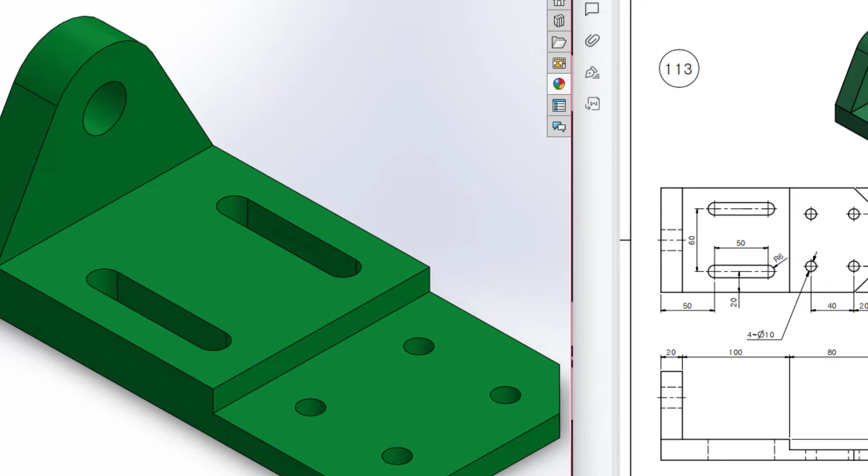Today we are going to solve this 3D problem. In this 3D problem, this is the isometric view, this is the top view, this is the front view, and this is the right side view.

I will start drawing from the front view. First I will draw this rectangle, and this rectangle has a dimension of 100 plus 20, it means 120 by 20. Then I will draw another rectangle alongside it, and this rectangle has a dimension of 80 by 10.

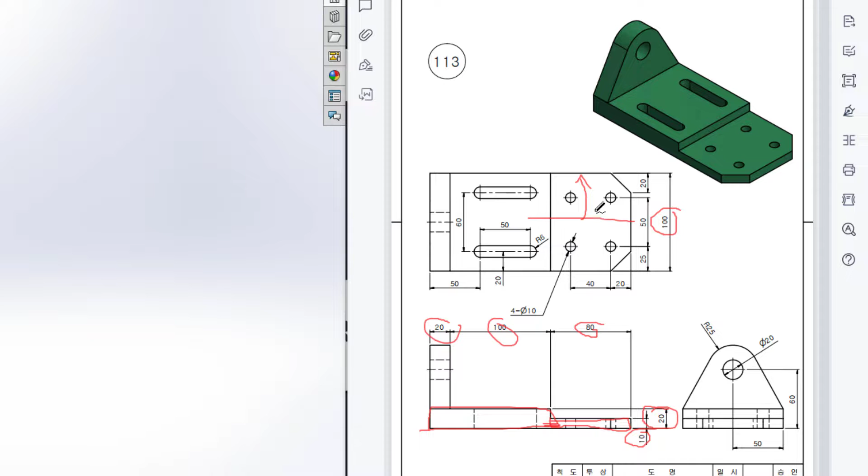Then I will trim this portion. After that I will extrude boss it to 100 units, and for extrude bossing I will extrude boss in direction 1, 50 units, and in direction 2, 50 units.

Select the front plane. Now sketch, select corner rectangle, place the corner rectangle to the origin. Now dimension it to 20 by 100 plus 20.

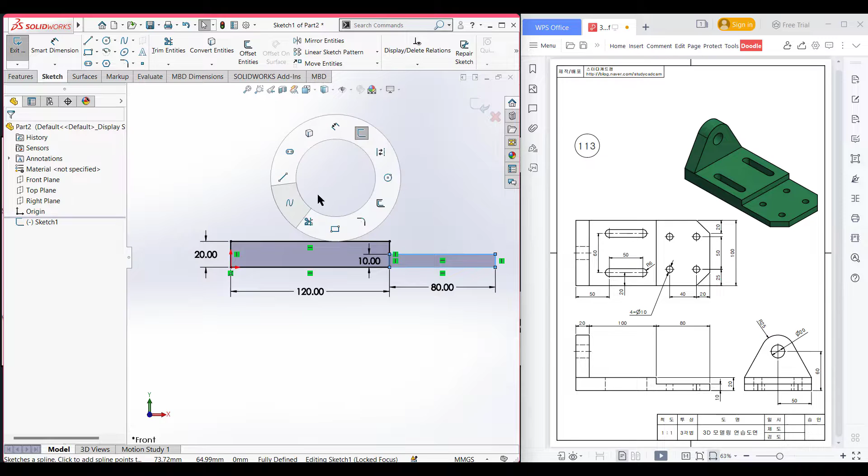Now again place the corner rectangle here, and dimension it to 10 by 80. Press OK. Now select the trim option and trim this line. Press OK. Isometric it for a better view.

Now go to features and then extrude boss. As the total extrude boss is 100 units, I will extrude boss it to 50 units in direction 1, and in direction 2 I will extrude boss it to 50 units. Now press OK.

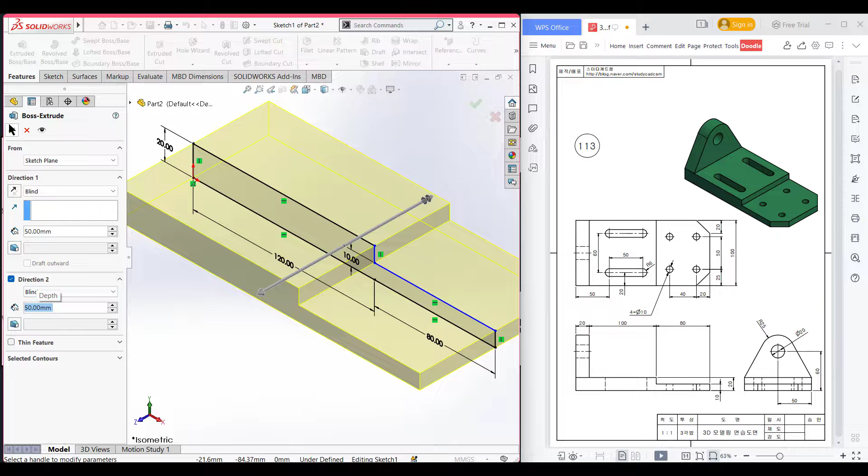In the top plane I can see a slot here, and this slot has a dimension of 50, and it has a radius of 6.

So I will draw first this slot, then after that I will draw this circle, and this circle has a diameter of 10, and it has a distance of 25 by 20, and I have another circle here, apart from 40 units. After that I will draw a center line here, then I will mirror this other circle and slot also.

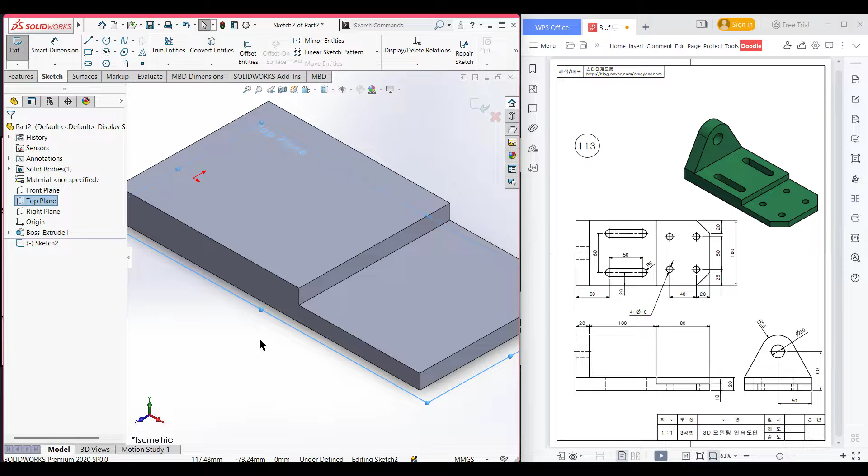So I am selecting the top plane. Now sketch, normal to it. Now select the straight slot option. Now place the slot here, and dimension it to 50.

As we have, it has a radius of 6, so the total dimension will be 6 multiplied by 2. So you can manually dimension it like this. It has a total dimension of 50 and a radius of 6 units.

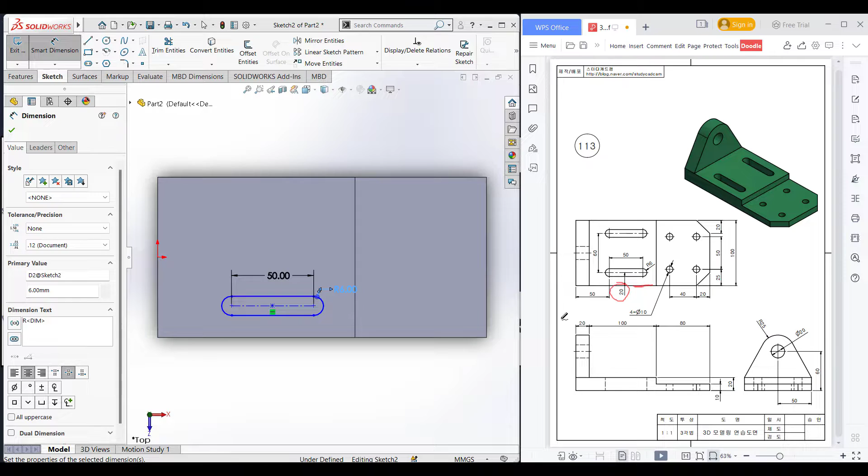We can see it is 20 units apart from this line, so I am dimensioning it from this to this, 20 units, and it has 50 units apart from this vertical line. So I am selecting this point and this vertical line and dimensioning it to 50 units.

Now press OK. After that select a circle, and now place a circle here and draw a circle of 10 diameter. Now select smart dimension option. Now dimension it from this line to 25 units.

Now select the circle again and dimension it from this vertical line to 20 units. As I have another circle, I will draw another circle alongside this center line and dimension it to 10 diameter. Now select smart dimension.

Now select these two circles, and they are apart from 40 units. Now we will use the mirror features to mirror all the entities.

For doing this I need a center line, so I am drawing a center line here. Now press OK. Now select mirror entities. Select this slot and these two circles. Now select mirror about this center line. Press OK. Now isometric it for a better view.

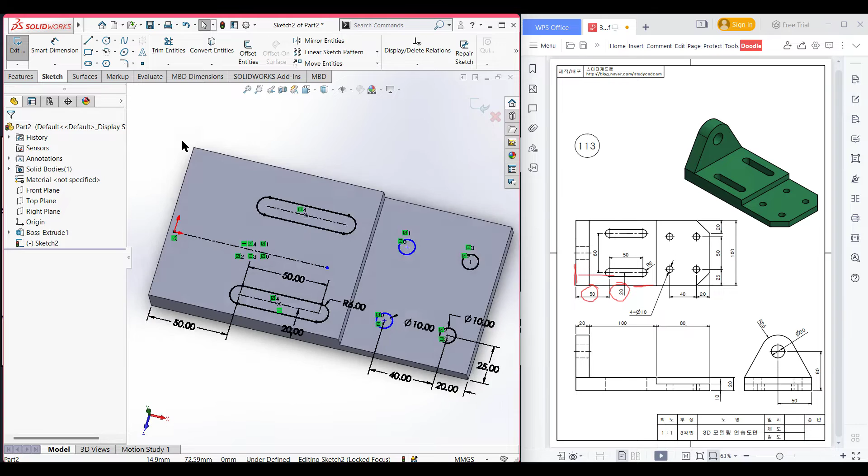Now go to features and extrude cut, and change the direction to upward. Now press OK.

Here we can see we have a chamfer here, and this chamfer has a dimension of 20 by 20. So we can say that it is a symmetry chamfer.

So I am selecting the chamfer option. Now selecting this option. Now select symmetry and dimension it to 20 units. Now select this corner and also select this corner. Now press OK. Now isometric it.

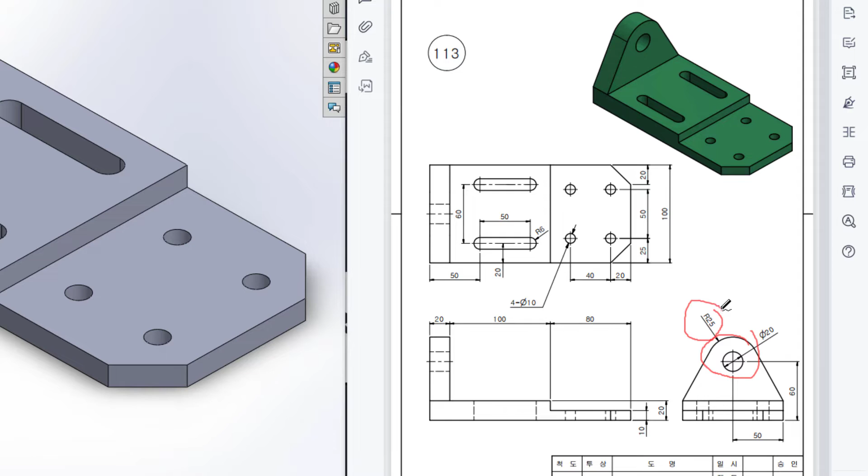Now if I see in the right side, in the left face we have this shape, and this shape has a circular profile like this one, and this circular profile has a dimension of 25 units, and from this 25 unit dimension I have a tangent line here and another tangent line here. After drawing this tangent line I will close the shape and draw an extrude cut hole of 20 diameter.

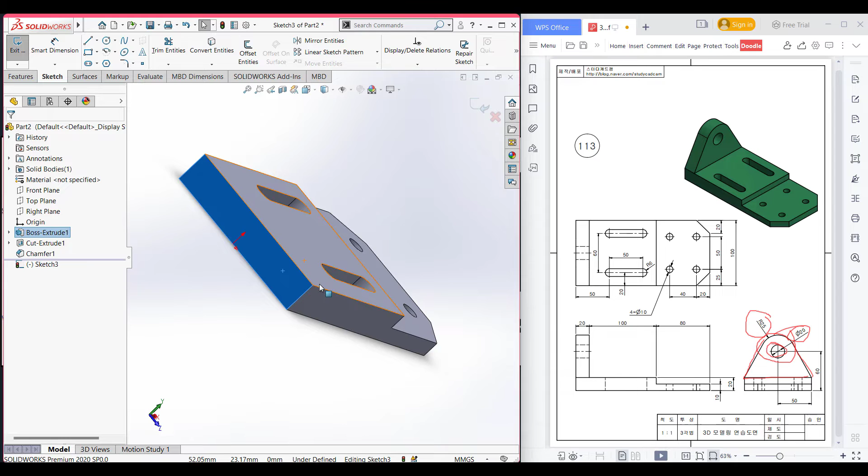So for this I am selecting the left face. Now select sketch, normal to it. Now draw a circle of 25 radius, so drawing a circle of 25 multiplied by 2, it means 50 diameter.

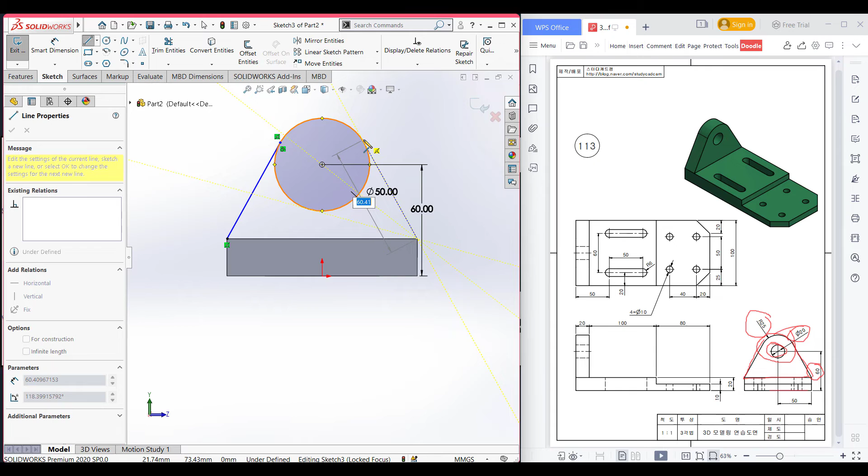Now dimension it, here you can see it is 60 units apart from this horizontal line. So dimension it from this horizontal line to 60 units. After drawing this, I select the line option and place a line here, draw the tangent line, select another point here and draw another tangent line. After that you can close the shape like this one.

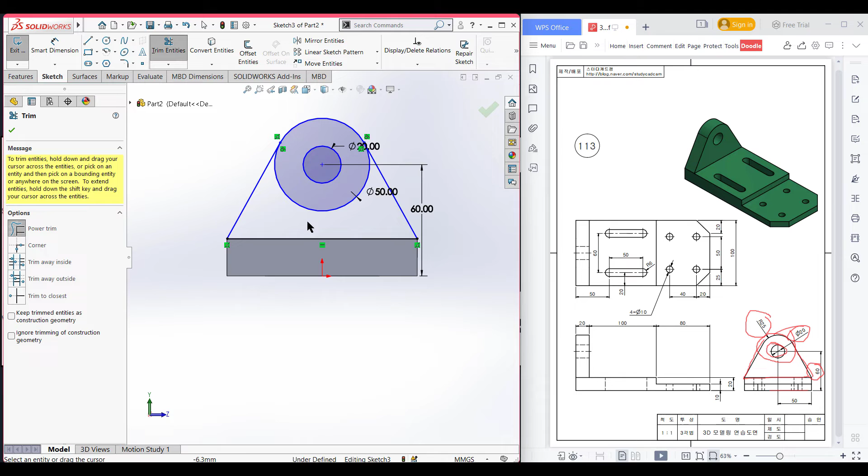As we have an extrude cut hole in the middle, I will draw a 20 diameter circle here. Now select the trim entities option and trim all the unnecessary parts we don't need. Now press OK and isometric view for a better view.

And here we can see it has an extrude boss of 20 units. So I am selecting the feature option. Now select extrude boss. Now dimension it to 20 units. Now reverse the direction. Now press OK.

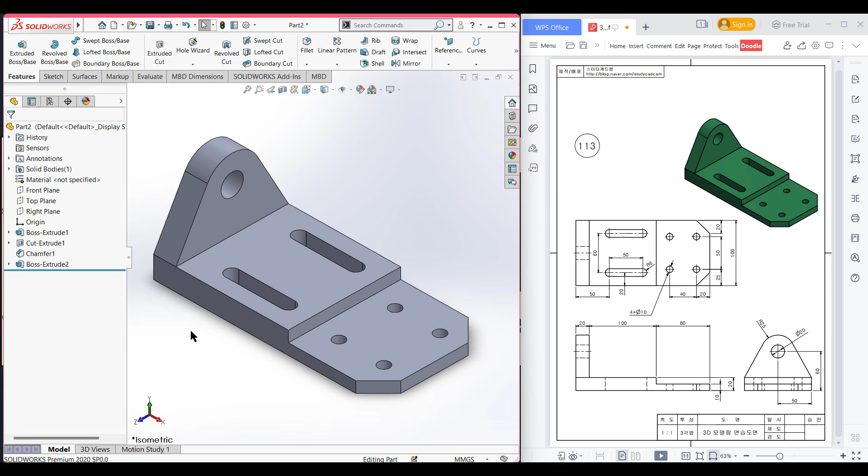As you can see, we have drawn our 3D sketch. Thank you for watching till the end.